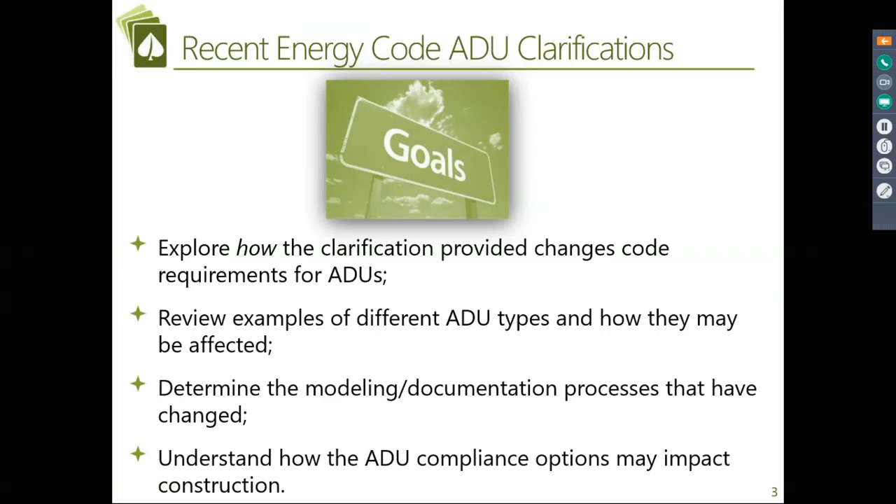So, code—now we get to talk code, everyone's favorite part. Our current code is the 2016 code, and we have another one coming up very soon called the 2019 code that goes into place January 1st of 2020.

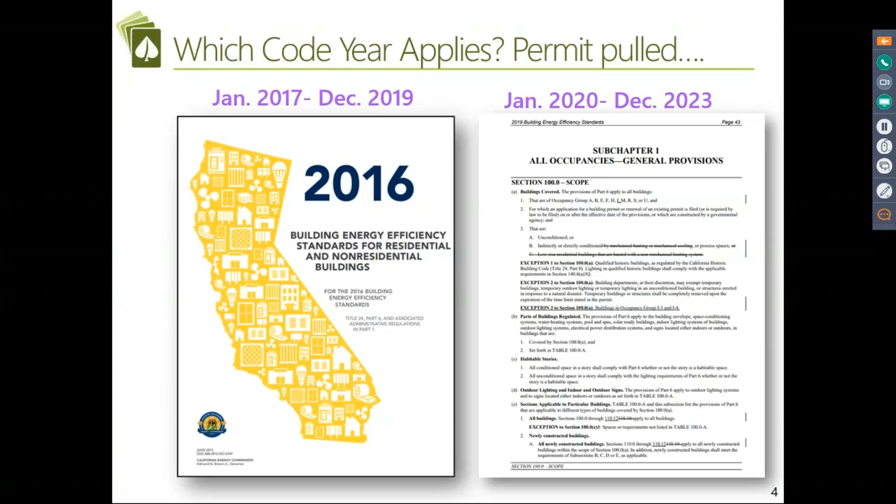How many of you want a spoiler alert of how ADUs are going to change for the next code cycle? Raise your hand. So what I do is give a spoiler alert, because I want you to make sure you understand current code versus next code.

So Reference ACE—it is really my favorite tool ever. I am looking things up in the code constantly. I think I have them memorized, but I always prove myself wrong. This has the code language, the manuals, the appendices, everything the Energy Commission provides to support the standards. Everything is searchable, hyperlinked, you can use it on your phone. Yes, I do have it on my phone—I am that kind of nerd.

What is an ADU? I found this particular resource from the California Department of Housing and Community Development. I thought it was one of the best resources I was able to get my hands on explaining what an accessory dwelling unit is and how the laws have changed with the series of Senate and Assembly bills that Ada discussed, and how it affects what we're looking at.

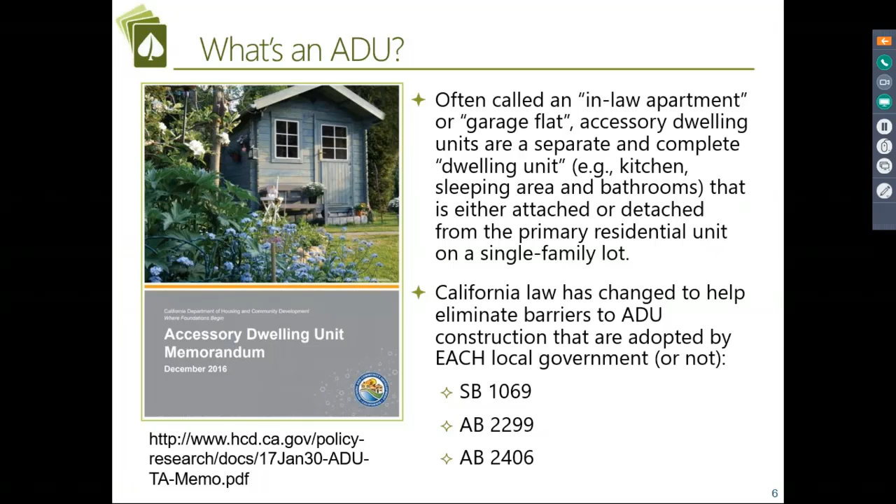It does clearly state that each city or county or authority having jurisdiction has to come up with their own formula for how they're going to look at ADUs. So don't always think what you think you know is going to apply to the city next door—you have to do your research city by city, county by county, jurisdiction by jurisdiction.

So I, of course, decided to look for what cities have put out there. Do we have someone here from the city of San Francisco?

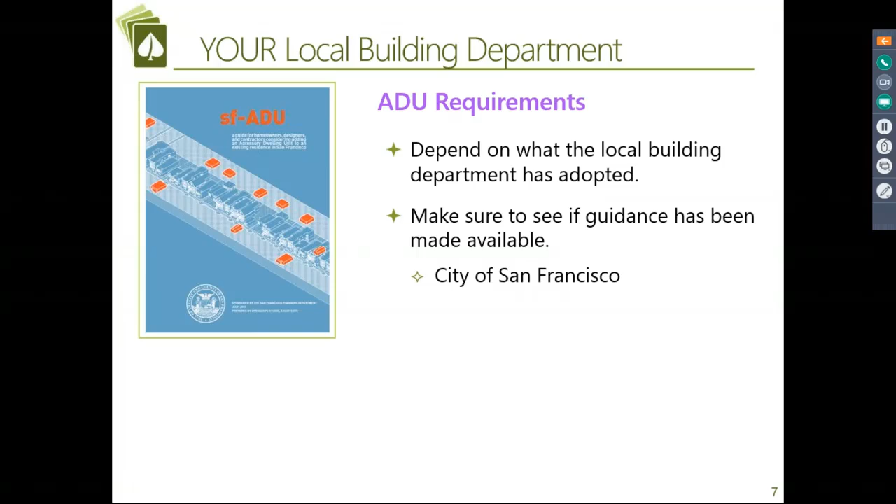This is the most amazing resource to support how to build and what the impacts are and what the projected costs are for building ADUs in San Francisco. It was one of the best I have seen, and I think everyone building anywhere should look at it because it had beautiful descriptions of all the different types of ADUs, junior ADUs, and how it works with multifamily. Such an amazing resource, so thank you City of San Francisco.

This was gorgeous. I really liked the City of LA's also. They were a lot more graphic, a lot more simplistic in their explanation of how ADUs work in their particular city.

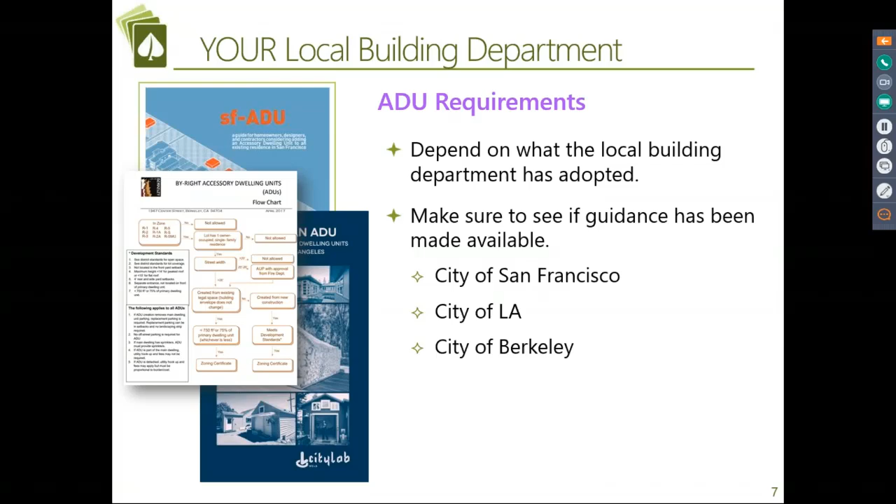And I, of course, can't ever ignore City of Berkeley because they're my backyard. They have a great flow chart. I liked how they talked about this particular conversation as a flow chart of what do I need to figure out first, second, third, and how will it apply to my construction permit process. So there's lots of great information out there.

So the Energy Commission has a quarterly newsletter that they call the Blueprint. Who here has heard of the Blueprint? Raise your hand. Okay, all of you should know it.

This is how the Energy Commission communicates with us throughout a code cycle and lets us know about clarifications. This is how we find out that things might look a little bit differently than what we thought they looked like. So they're available through the Energy Commission. I'm going to show you how to get to it at some point—I can't remember where I put that slide. And I asked the Energy Commission to give me a statement on why and how this clarification came out.

Chris Olvera is one of my favorite people over there, and this was their statement: the construction of ADUs has just grown, and the energy code and how we were looking at it can be very restrictive to how we look at ADUs and how that constructability can be. Taking this on as, hey, what's the best way to look at this in terms of the energy code—they came up with this clarification. And honestly, it blew me away.

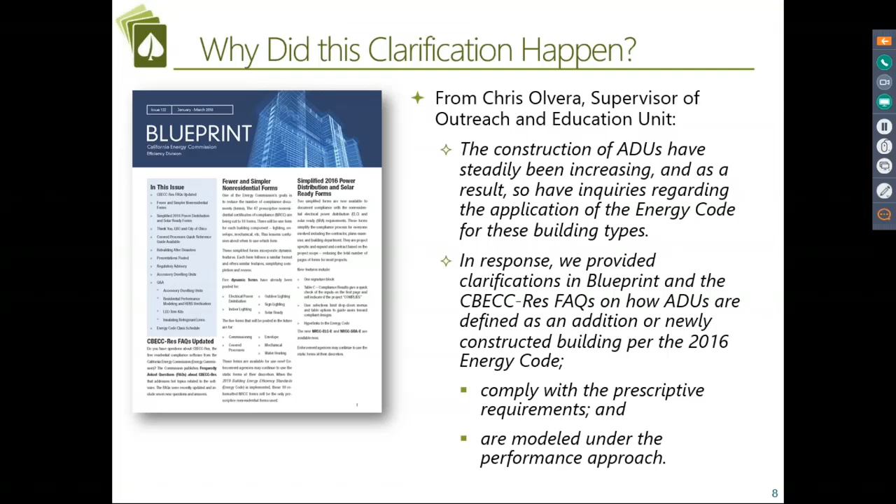When this blueprint came out, they say they time how quickly they'll get a phone call from Gina after a blueprint comes out. This was a 30-second time lapse between the email that came out and Gina's phone call to the Energy Commission going, what? Really? Oh. So I immediately—I think within 25 days—we did our webinar on ADUs because it was such a big thing.

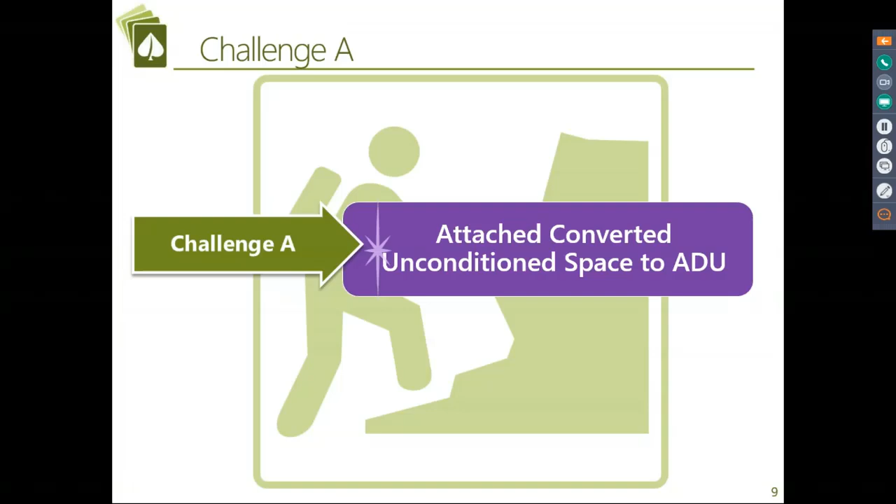So per the Energy Commission, there are 4 different types of ADUs. We're going to walk through those relatively quickly. The first is an attached, converted, unconditioned space to an ADU. There's handouts, and the very first page of your handout supports this particular type of ADU conversion.

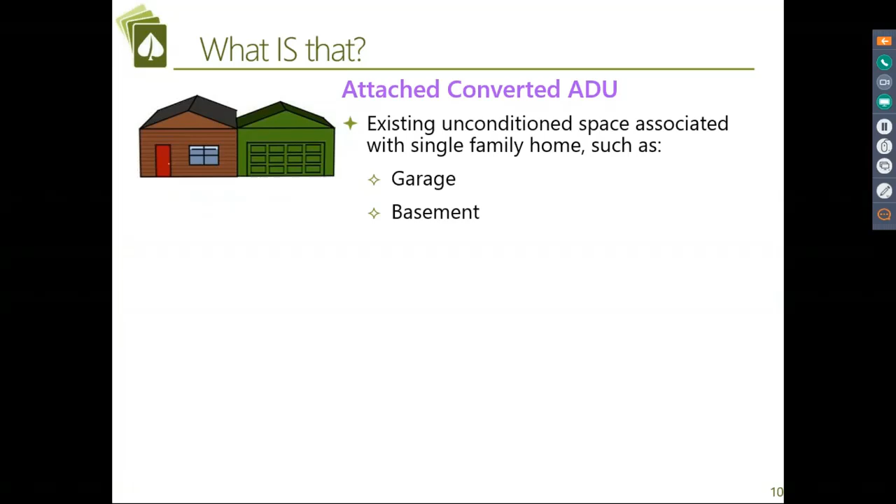So this is an unconditioned space that already exists that's attached to the single family home. Most likely this is usually a garage—that's what usually people visualize. We have very few basements in the Bay Area. I do actually have one of the few houses that has a basement. I got the price to convert my basement to an ADU because they have to dig down—$100,000 just to dig down. Yeah, it's not going to be an ADU.

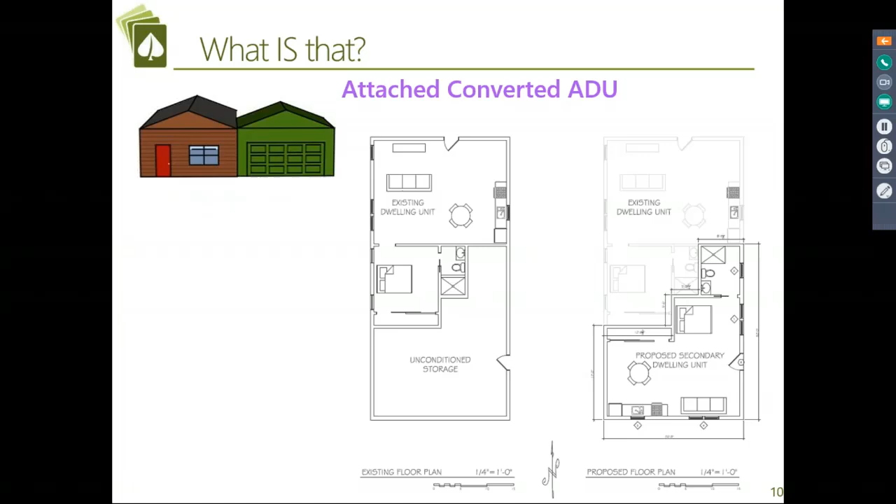I got to tell you, the Energy Code does not differentiate between an ADU and a junior ADU. All the code requirements under Title 24 Part 6 apply exactly the same. So what is it that we need to be cognizant of? Before this clarification, that was considered an addition, and as an addition, it would have to meet all of the Energy Code requirements of new construction as an addition. That space didn't exist before as conditioned space, so it has to meet current code in terms of the building features.

What I got to tell you—does anyone know what we're doing in California in terms of energy efficiency? If any group should say, oh yes Gina, it should be you. We have some very aggressive goals in California, and every single time I talk to a homeowner, they are blown away by what the Energy Commission, the Energy Code, expects of their building type. They're like, what? But my house I'm in now doesn't even have any insulation at all, and you want me to build this? It's always a fun conversation.

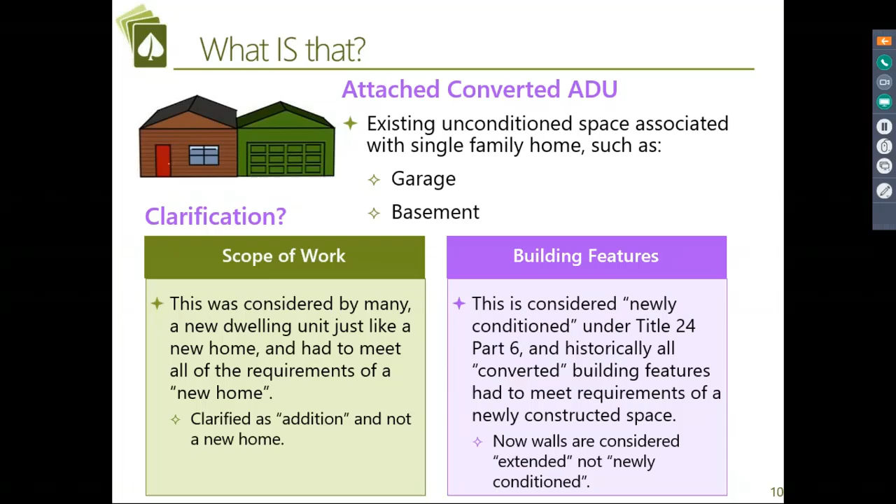The clarification says that existing unconditioned space attached to legally permitted conditioned space is considered altered. So now we don't have to consider those walls new. They're what we call extended. I hate that they call it that, I think 'converted' should be the word we use, but they're what we define as extended. That roof now can meet all of the exceptions and flexibility associated with additions because it's not considered a brand new building. So let's go through what some of that is.

When we look at additions, we have two categories basically: 700 square feet or less of conditioned floor area, or greater than 700 square feet. For 700 square feet or less, there's a lot of leniency under the Energy Code regarding how that building needs to be insulated. If I have an addition 700 square feet or less, I only have to worry about R22 at the roof. That's a pretty big deal, because if I have an addition over 700 square feet, I have to have a high performance attic, and we'll look at that next with our next type of ADU.

So this is just R22, insulation could be blown in, it could be batt, it could be spray. I don't care what you're going to use. It has to be in full contact with that ceiling unless you're going to do some sort of hybrid type of attic space. And it's pretty simple to do.

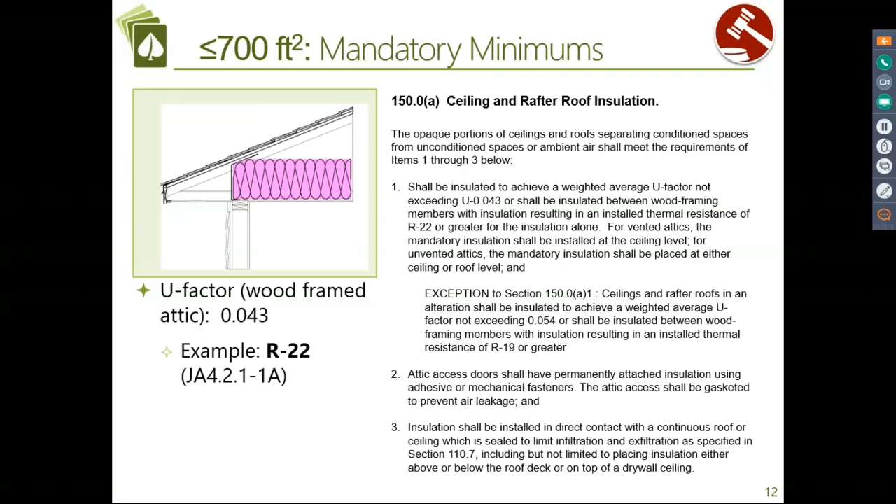This is the least of everything. I don't have to worry about a radiant barrier until that ADU is over 700 square feet. I might have to think about a cool roofing product though, if that ADU exceeds 300 square feet. I have begged the Energy Commission to please make all the numbers line up. Does anyone know why all these numbers don't line up and make this easier? Cost effectiveness. Everything under the Energy Code, every code feature has to show cost effectiveness that is going to pay for itself over the lifetime of that building feature.

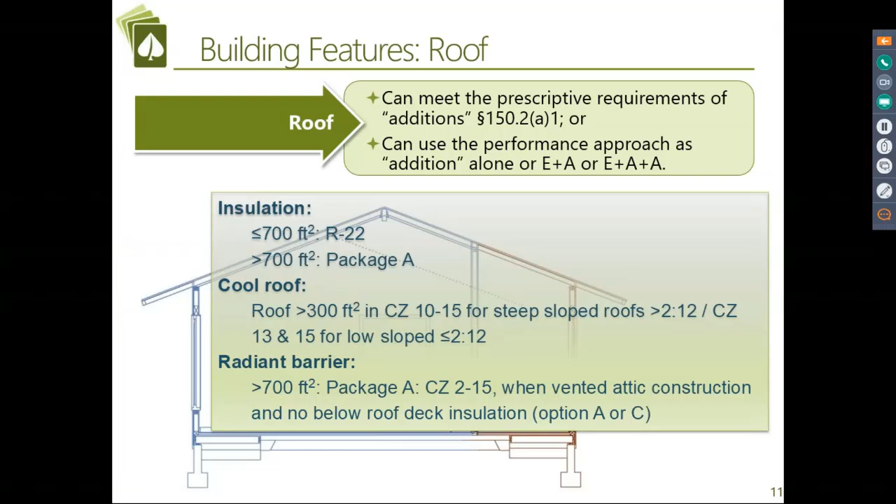So this is where we have these weird little rules about 700 square feet or less, R22. Above that, now you've opened up the door, you have more flexibility in terms of cost effectiveness to integrate a high performance attic. That's what they figured out with the cool roof at 300 and with that radiant barrier at 700. So the walls - walls are those existing walls are now what we call extended walls.

So what I've got here is we show the walls associated with that existing conditioned space, and that wall that is there already associated with the unconditioned space is now considered extended, even if it's not extended. Isn't that fun? This was a great clarification. But what it means is it gets all the leniency associated with extended walls. It was their way to find something that was in the code that made sense and allowed us to alleviate cost associated with ADU conversions. That made sense.

So this particular ADU, can you see how we have existing walls that now are going to be converted into conditioned space?

So extended walls get the exception of: if it's a 2x4 framed wall, I have to fill the wall cavity with a condensed batt of R15. A little bit more expensive than R13. It's not always easily available. Sometimes we have to tell people order it way ahead of time because this is a relatively unique insulation in this day and age. But if I have R15 insulation, you're done.

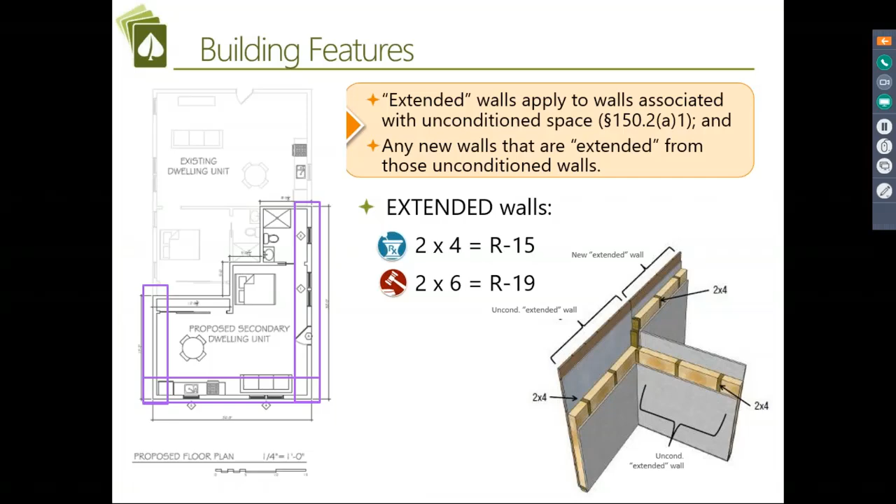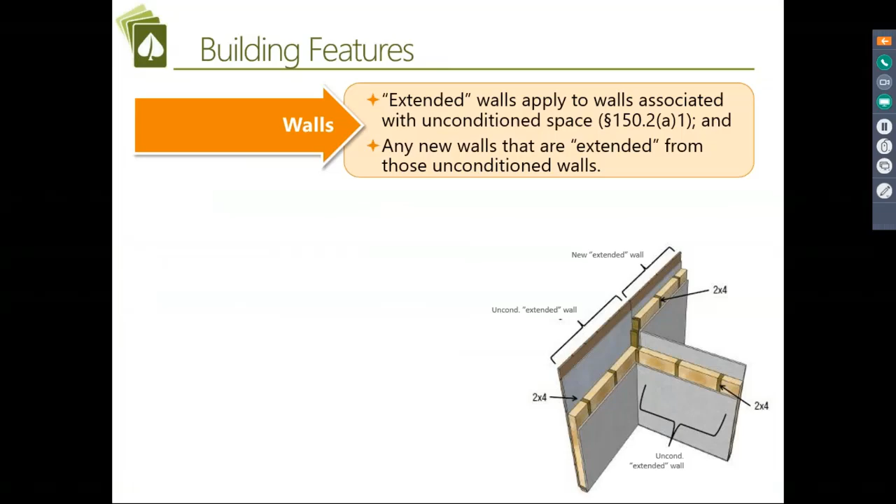If it's a 2x6 framed wall, use R19, you're done. Spoiler alert: our 2019 code, that 2x6 will go to R21. Not a big change. Same thing - calling this an extended wall stays exactly the same. The stuff for the roof also stays exactly the same. So not a lot of changes going on here for the next code cycle.

Fenestration: windows, glass doors, skylights - it's all about size of addition. So if I have an ADU that's 400 square feet or less, I get up to 75 square feet of fenestration to use wherever I want, depending upon your climate zone. If you're in a climate zone that is not climate zone 2 - that's climate zone 2, 4, 6 through 16 - so here we're in climate zone 3 today. We don't even have to worry about west-facing restrictions if we're in climate zones 1, 3, and 5.

Otherwise, we do have to think about how the building is oriented, how the sun is hitting it when people are usually coming home from work, and there's a lot of sun on those windows and they're using a lot more air conditioning. We're fogged in when it's hot outside. We actually have shown we use more heating in the summertime than we use air conditioning.

So you get a lot more leniency in how much window area you get, because a brand new home, it's 20% of the conditioned floor area. For this smaller size, it's 30%. It's kind of nice, it gets a little bit bigger, between 400 and 700 square feet, it's not 20%, it's 25%. We're still getting a little bit more allowance, understanding we need to get that natural light into the space, and we need egress, and we need ventilation.

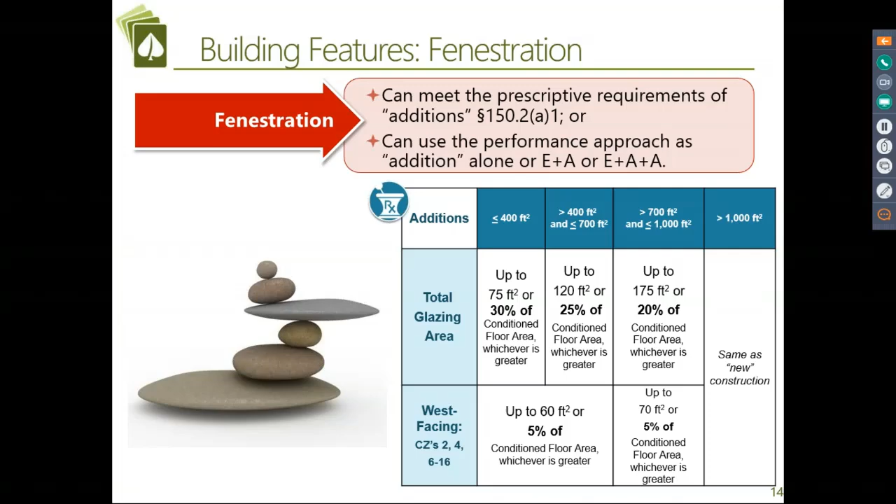So, HVAC, indoor air quality, and domestic hot water. I'm going to spread my love of this topic as we move along. I am a plumbing designer as my beginning trade, so whenever we talk about this, I'm like, this is the most important part of the home.

So the energy code dictates indoor air quality the minute we have an addition, which is now a converted ADU, exceeding 1,000 square feet. But is that really what we want? Shouldn't each dwelling unit get its own indoor air quality ventilation system? So we highly recommend that each dwelling unit, I don't care how big it is, has its own indoor air quality ventilation, but the energy code cannot dictate you do it until that ADU conversion exceeds 1,000 square feet.

One thing you do need to know, though, is that the mechanical code will not allow dwelling units to share return air. So if you have a standard split HVAC system with ducting running all around your attic, and you want to tap into that for your ADU for those two bedrooms you might want to convert, you can't, because you're sharing return air. We don't want to share what you might be doing in your personal space with my personal space.

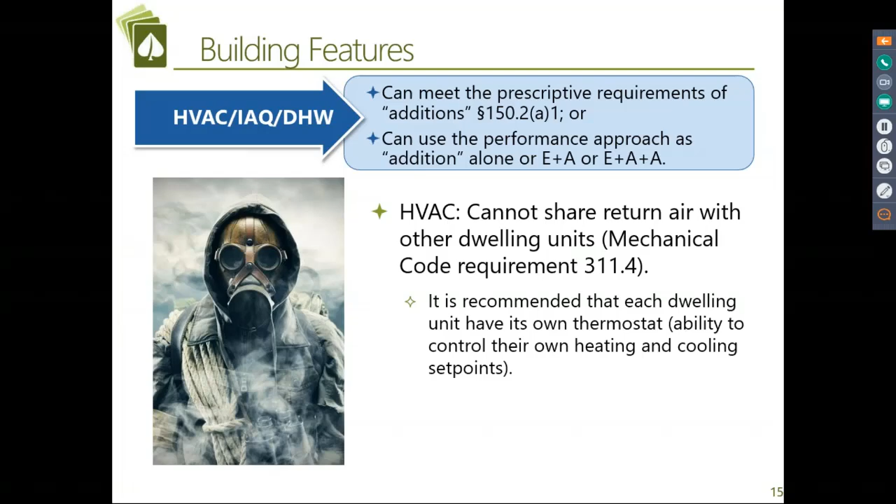So what does the CF1R say? This is what I was going to speed through since you guys don't do it. The Energy Commission has a beautiful form just supporting additions, and that is not facetious, it actually really is a beautiful form. They really walk you through what's the size of your addition. Remember, we had all these weird rules depending upon size of addition? Well, the form automatically will populate those window area allowances and so forth based on your size category.

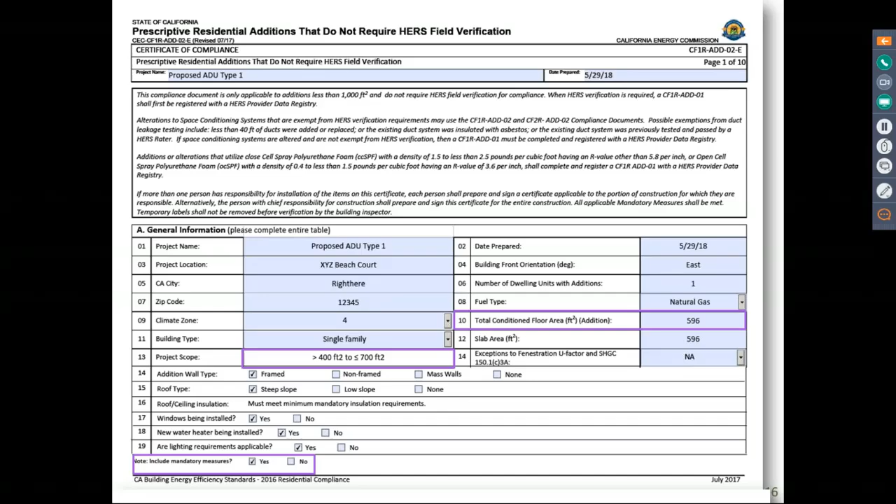So these are things that I just really love about the form. There's a lot of drop-down menus, there's a lot of interaction. This is, to me, one of the best types of forms we've seen. I've been doing this since 1991, so a very long time. It's one of the best forms we've seen in really understanding how the energy code applies.

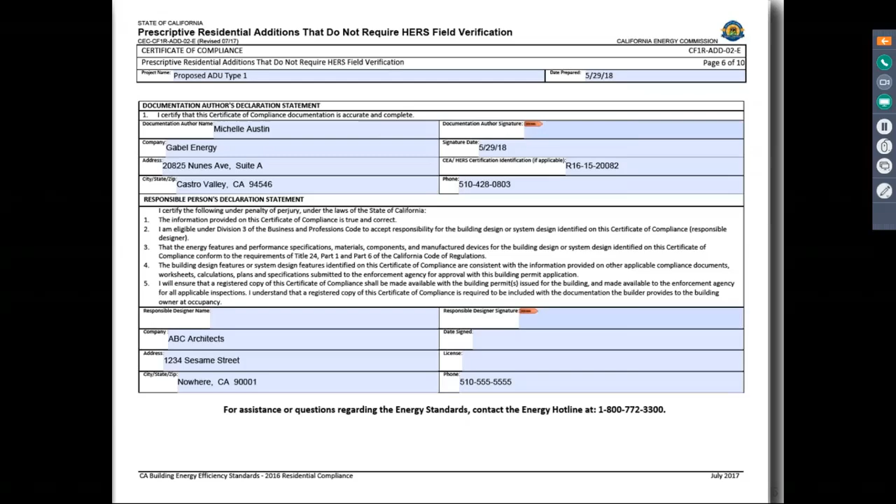Typically, we're not going to have HERS measures associated with these small additions because I really want to get away from ducted systems. The minute I have a ducted system, I will have HERS measures. If I don't have ducted systems and I don't have an ADU that exceeds 1,000 square feet, I typically won't have any HERS measures. And there's a lot of complexity associated with registering documents and having third-party inspection when we have HERS measures.

Questions on converting an existing space that's attached to an existing home before I move on to the next one? Got it down? Okay, on to the next one.

I'm attaching to my existing home, but I'm building it from scratch.

That's the second page of your handout. So this could be: I had nothing there before, but I've got the area in my yard to extend out and put conditioned floor area where it never existed before, and there was no structure there at all.

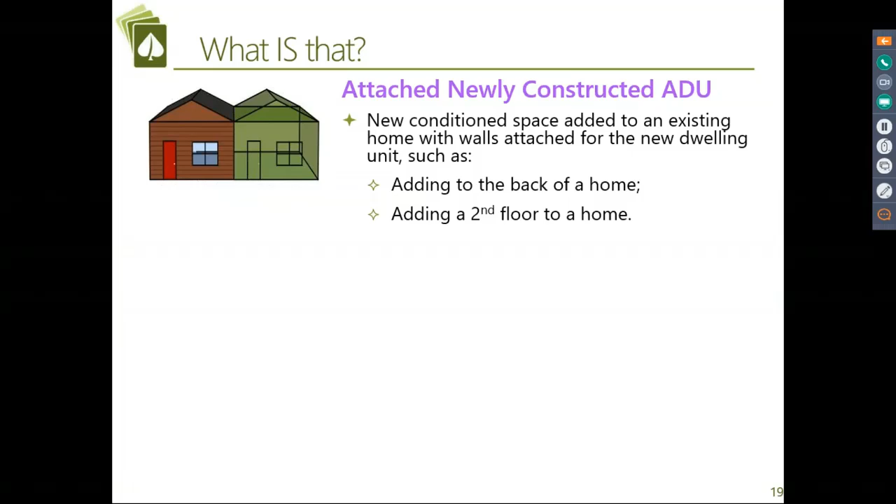This particular project, to me, seems better now that they filled that gapping corner and they're adding an ADU to a space where they never had anything before. They're having less yard to put in a brand new ADU. So these are brand new walls. There were no existing walls, brand new floors, brand new roof. Everything is brand new, but it's attached to the existing home.

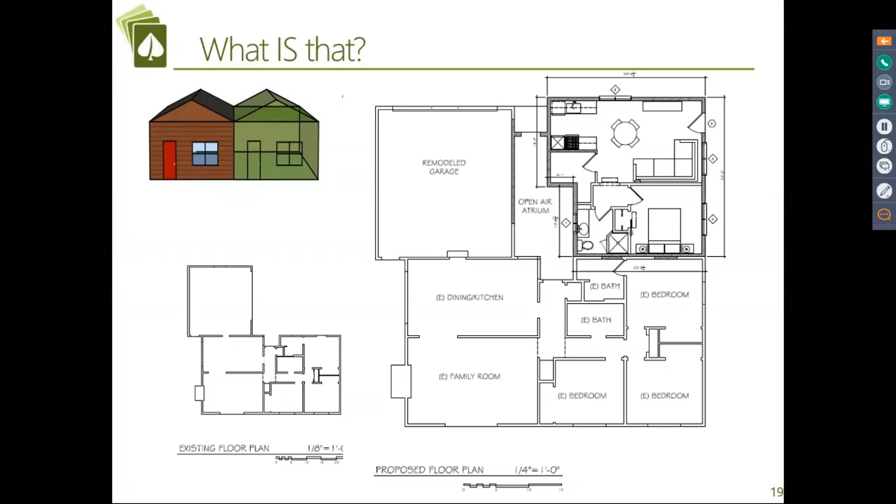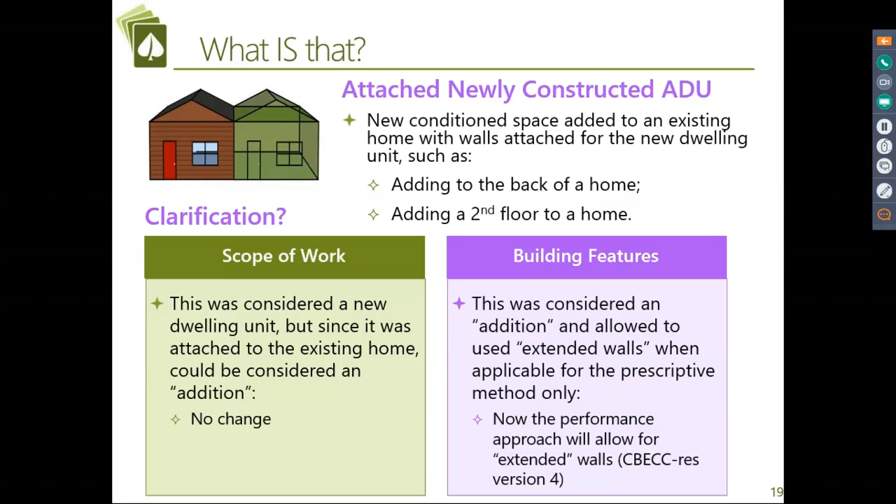This looks and feels just like an addition. So the clarification is: this is an addition, and all of the allowances for additions based on size and extended walls apply to this same type of construction, even though it's its very own dwelling unit. It is an addition to the existing home.

So for the roof, if I had an addition that's over 700 square feet, remember R22 isn't my exception anymore. Let's look at what it would look like, what I'd have to think about the minute my ADU is over 700 square feet. I have 3 different high performance attic requirements. We're going to go through these throughout our various types of ADUs.

So option A is I have insulation at or above the roof deck. Anyone seen that in real life? I never have. This is an elusive beast called option A. Spoiler alert, it's going away in the next code cycle because no one is doing this. Building science wise, this is the best. But roofers are typically in charge of the insulation and they will not take on that liability. That's why we typically don't see it.

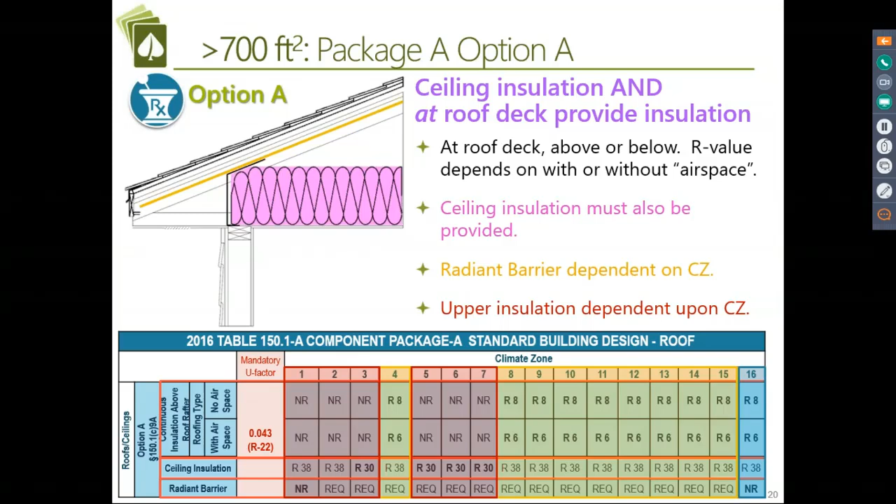So don't be thinking that this applies everywhere. Be cognizant of where the project is.

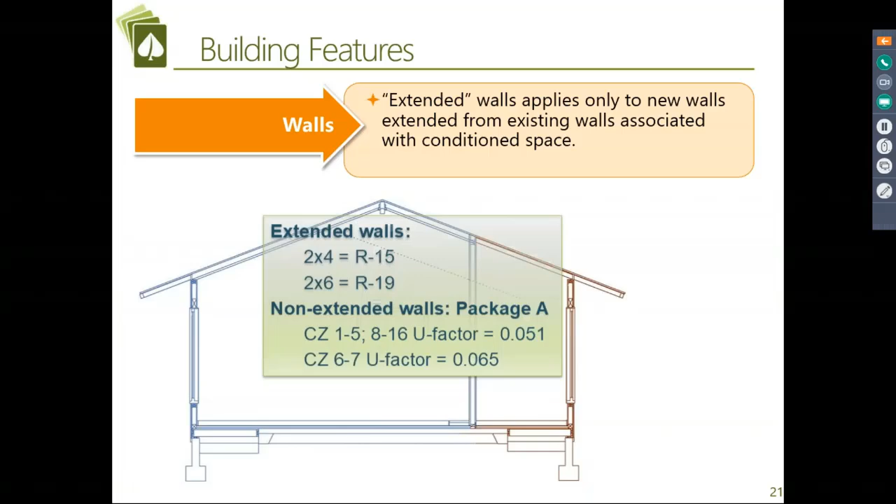Walls. Now I have extended walls and new walls. You might think they're all new walls, but I, as your energy consultant, am immediately going to be thinking, is it an extended wall or a new wall? Because remember, extended walls 2x4 are 15, 2x6 are 19. New walls, now we're talking 2x6 with R21 insulation and an extra 1 inch of rigid insulation outside the framing. That's what we're talking about if it's a new wall.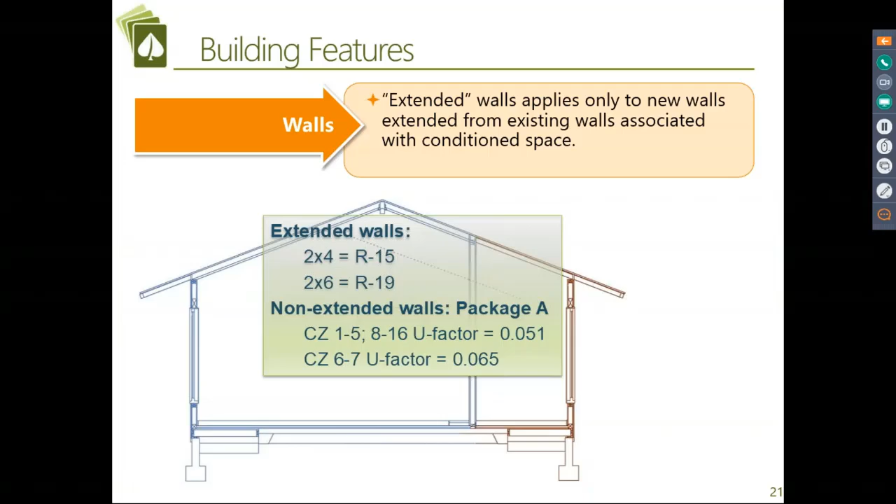What's that small little floor plate we have going on here, and how close are we to the property line? This is what usually becomes the biggest discussion with all our clients. So here is our project, and I've labeled some walls here, A, B, C, or D. I'd like you to tell me which letters are extended walls.

C is an interior wall now. It's now conditioned space on one side, conditioned space on the other. So that is an interior wall. B and D, excellent. So B and D are what we call extended walls because they're extending the plane of the existing walls that were there already associated with conditioned space, meaning all the other walls that aren't extending from that plane are new walls.

So here, potentially, if we do this, a simplistic method, I have two different types of walls for this very small ADU. Extended 2x4 with R15, turn the corner 2x6 with R21 and 1 inch of rigid.

Everyone loves to construct that, right? Has anyone ever seen that in reality? No. Two things happen: they either trade it away, or their contractor does what he wants anyway, and potentially final inspection is going to go horribly wrong because the walls do not match up to the promise of the energy compliance report.

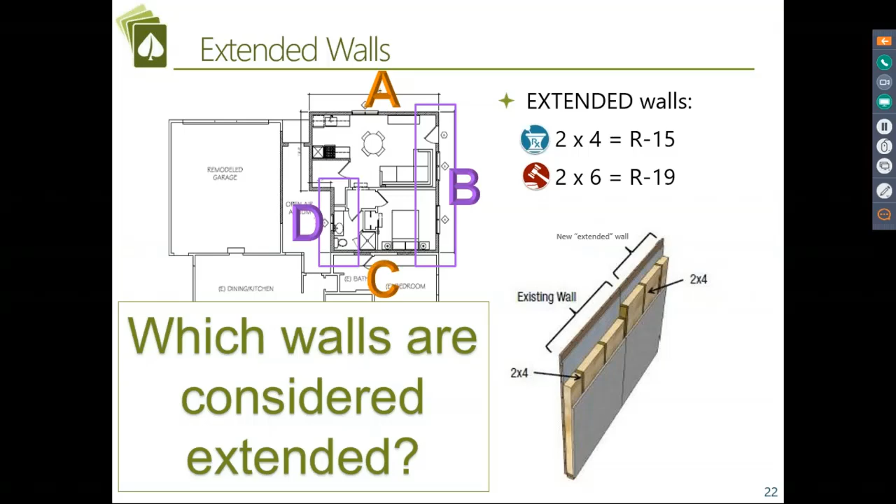So for new walls, again, the Energy Commission is looking at wrapping the building, embracing the building with rigid insulation. It is really helping a lot with the heat transfer associated with framing, but honestly, the biggest thing it's doing is preventing infiltration.

Because I want to add, do any of you insulate? Have you ever insulated your own home? Yeah, I hope all of you should do it once to understand the torture those people have to go through. My kids know it too, because they get to do the little spots.

But it has to be done beautifully. Insulation doesn't work if it's compressed. It is not fully fluffed. Tell everyone, fluff. There's another reason for a crochet hook in your life. That rigid insulation is preventing all of that improper installation and having a really nice high performing wall. This is why it's called a high performance wall, because of that rigid insulation.

What might be another way for me to get this U factor of 0.051? Who here has built a home or designed a home with rigid insulation on the walls? Yay! Get the details from them, honestly. Detailing is the hardest part about that. What have the rest of you been doing?

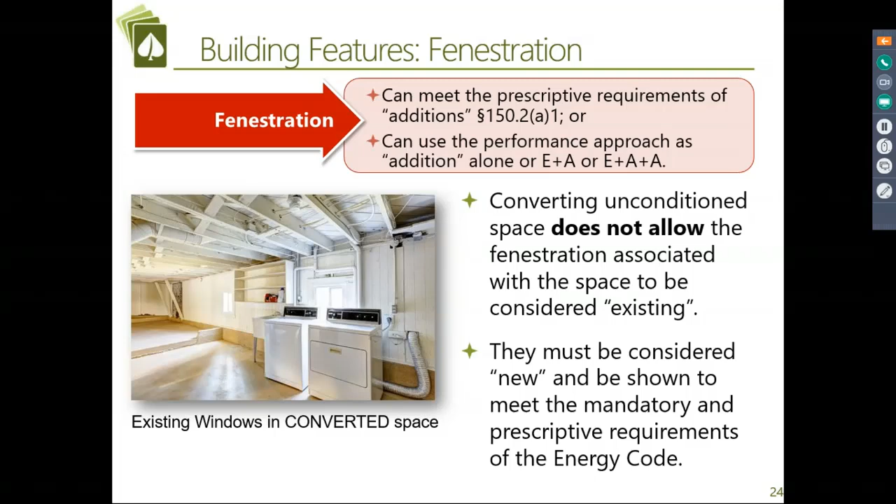When it's new construction, adding on to my historic home, do I get the same historic exceptions for this addition? No. Planning might say you have to make it look exactly like the existing building, but the energy code does not give you that flexibility because it's new construction. You have to be very creative in ways to get it to blend well.

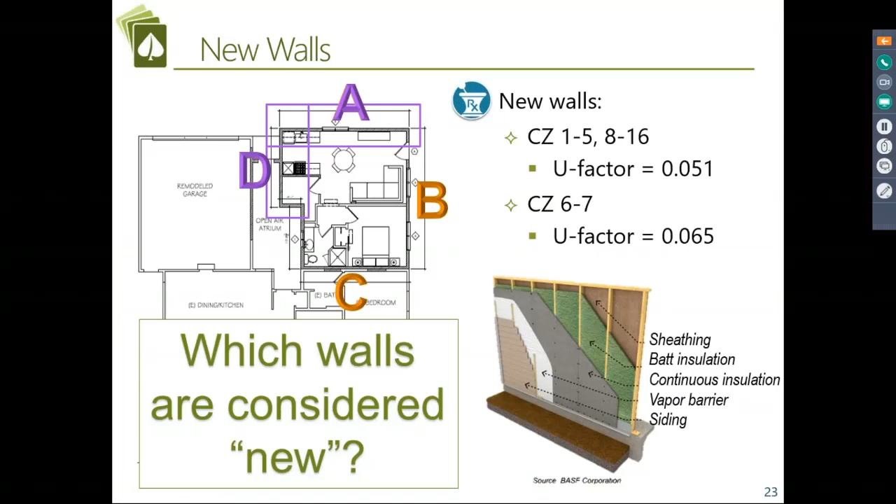When we talk about windows, we've already discussed how much window you have facing which direction. But I also want to talk about the performance of that fenestration product, in terms of SHGC and U factor.

Solar heat gain coefficient is the ability for that product to prevent solar heat gain when the sun is hitting those windows. U factor is the ability of that product to prevent heat transfer from one side to the other. This could be cold outside and hot inside, or cold inside and hot outside—how is that heat transferring back and forth, and it has nothing to do with the sun.

And these numbers are actually pretty aggressive. We have a U factor of 0.32. This represents a non-metal or thermally broken, dual-paned, low E triple, argon-filled product.

We have an SHGC of 0.25. This represents a low E triple. When I say low E triple, I don't mean triple paned—I'm saying there's 3 coatings of low emissivity film, that coating associated with the product.

The main component to low E is which element? What is the major element behind low E? Silver. So we're talking 3 coatings of silver to meet this 0.25 SHGC requirement.

I always have that conversation with my homeowners: this is just like putting 3 amazing sterling silver rings on your finger. Was 1 cheaper or was 3 cheaper? So you are paying for the privilege. But honestly, it really pays for itself.

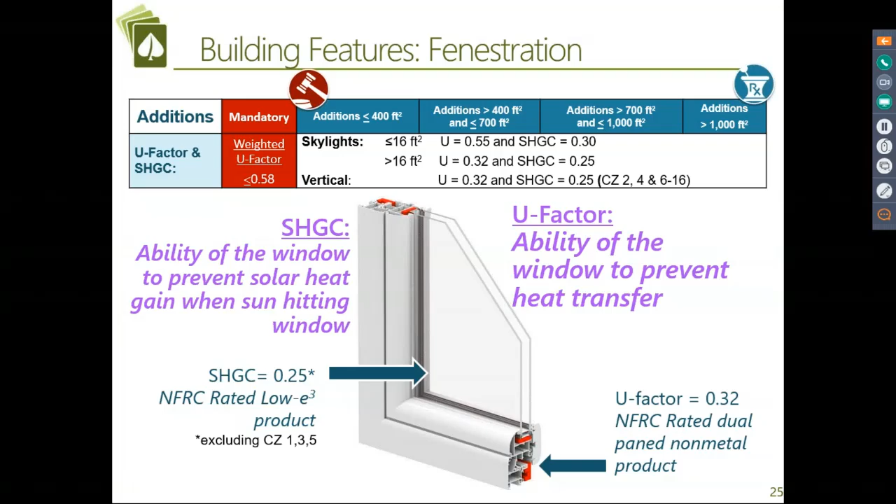The first thing I've done with every house I've ever owned is upgrade the windows. And I spend as much money as I possibly have, stealing from my kids' piggy bank and begging money from my parents at the same time, because it's the one thing that can make such a difference to a home.

So HVAC, indoor air quality, domestic hot water—we already talked about this a little bit. I don't have to worry about providing its own indoor air quality ventilation system until that ADU, now an addition, exceeds 1,000 square feet, though we strongly, strongly, strongly recommend it be done anyway.

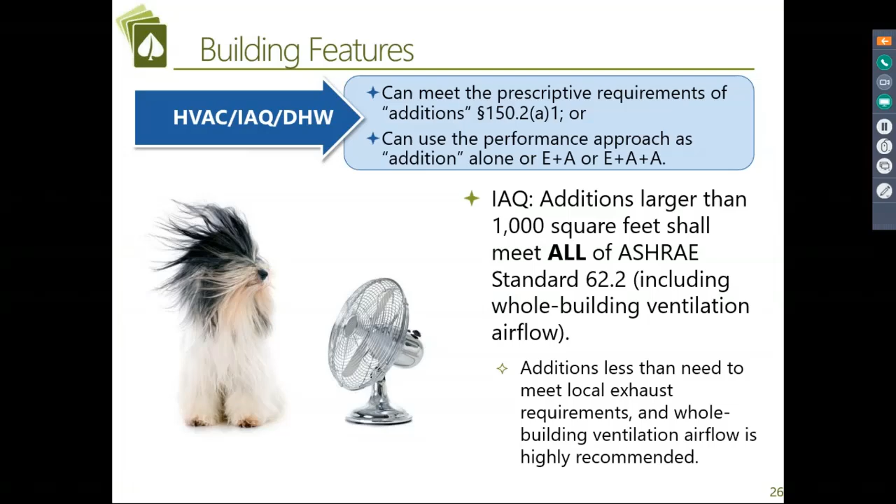Spoiler alert: next code cycle they cleaned this up. Now, in the 2019 code cycle, any new dwelling unit, I don't care how big it is, will have to have its own indoor air quality system.

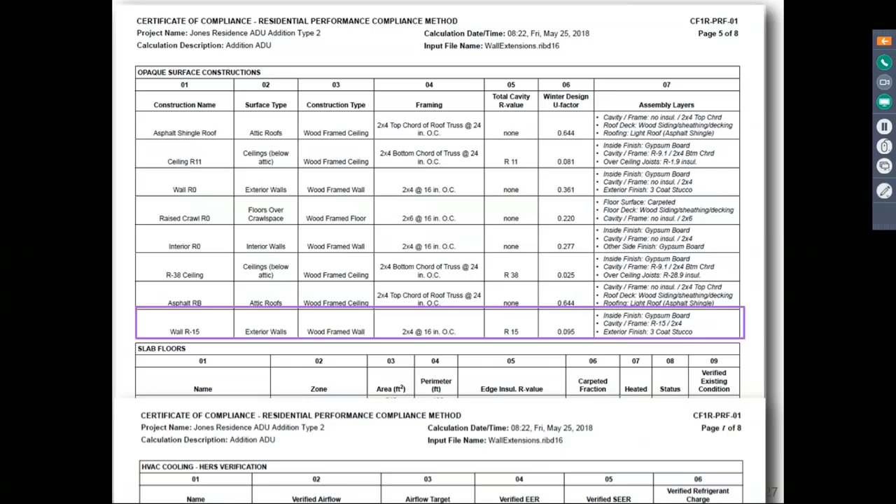So what does the calculation say? We're not even really going to talk about this because you guys don't look at these. You really should at some point in your lifetime because it tells you what's going on.

I was also asked to talk about when an ADU is made out of a space that's already there—a couple of bedrooms, that's that discussion Ada had. I'm adding a cooking device, I added a door to the outside. When is it a junior ADU? How does the energy code look at when you're carving out of your existing home to turn it into an ADU?

So my example here is that, hey, we don't really use that family room. Everyone live in your rooms—we're going to turn that into an ADU. Your kids wanted to be there anyway; they don't want to be out in the living room. Who else has teenagers? Yeah, you know what I'm talking about.

So what has to happen to the roof? What do I have to do to upgrade the roof per the energy code because I'm converting existing conditioned space to an ADU?

Nothing. It's already conditioned space. Walls - what do you have to do to the walls because you're converting existing conditioned habitable space to an ADU? There's a pattern here.

Nothing. Excellent. What do you have to do for fenestration? Nothing. Floor, nothing. Oof. HVAC.

There's no pattern going on here. What do you have to think about now for HVAC? You can't share the return air. So this is really, honestly, for the energy code going to be your most expensive item, because I would honestly be thinking about putting a mini ductless split system in here, separating out and putting in their own indoor air quality ventilation system. Hey, if I'm really short on funds, I might put in just a wall furnace. It all depends on where I want to go.

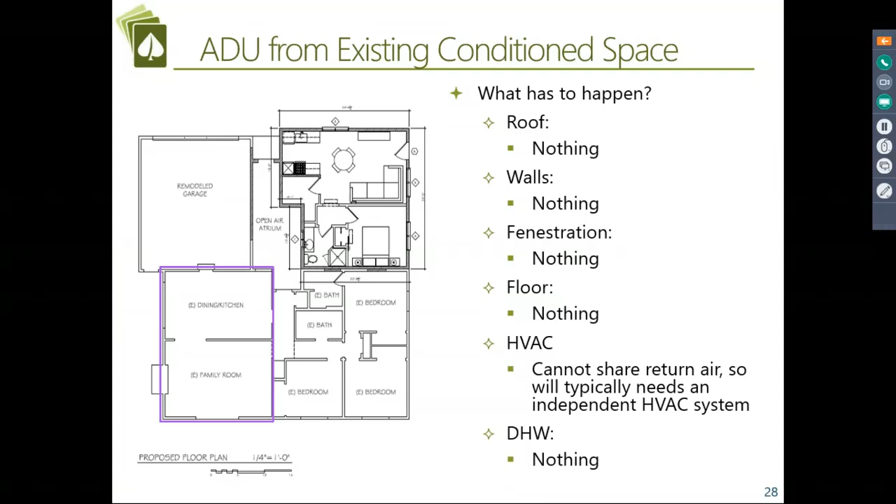What do you have to do for domestic hot water? I'm going to tap into the water heater that's already serving the home. Nothing - that's totally allowed. You can share hot water with others, please do. Any questions on adding on to a home and building from scratch?

I love it. That's either you're bored silly or I have done this really well.

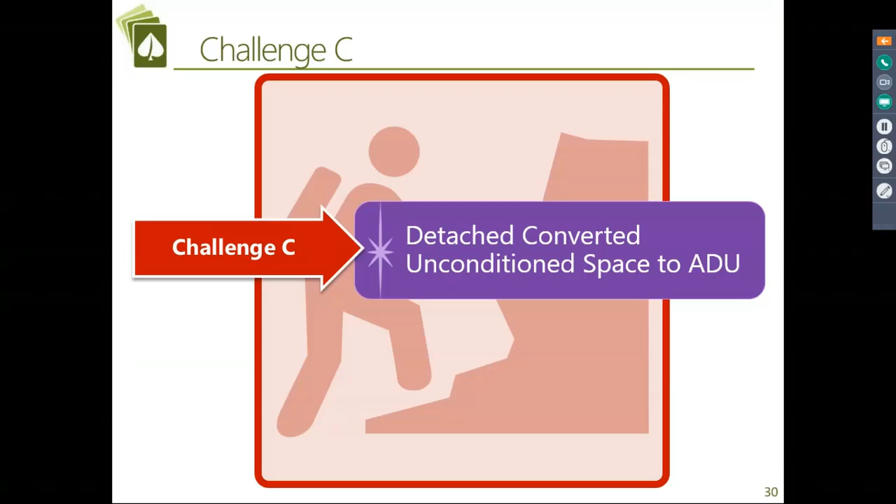Okay, detached. And I find in our experience, detached is the more popular ADU choice in the Bay Area. So I am converting an existing space, let's say a 2-car separate garage, to a new conditioned ADU space.

This could be a pool shed. This could be a - we've seen all sorts of - this could be an illegal unit. It's an existing space, it was never legally made conditioned, but it is there. So this is where I put the category of trying to get an illegal unit to be legal.

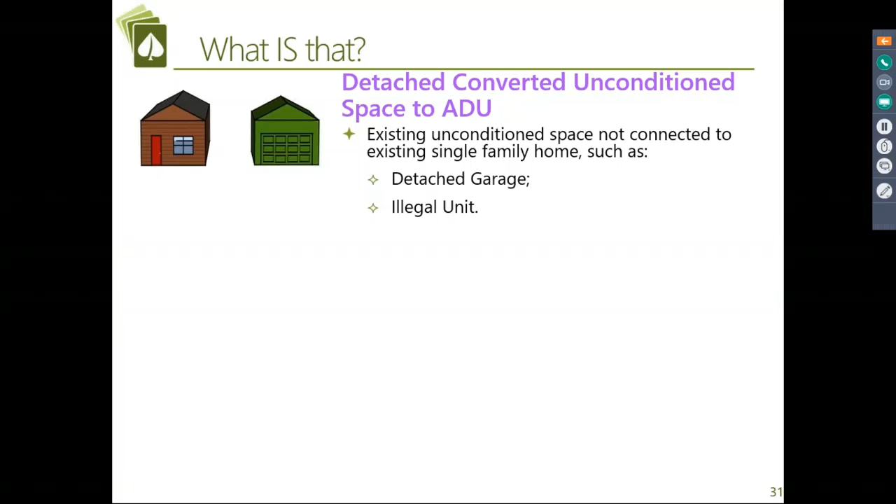And this is the one that blew me away when I read and interpreted the clarification. So previously, this was conditioned space for the very first time, and it had to meet the energy code for new construction in its entirety.

That can be difficult when you've got this existing structure. You're like, you mean I have to rip those walls down and everything down because they're not going to be able to be a high performance wall or a high performance attic? Well, then what's the point? All of a sudden now the cost to do this ADU is way beyond what they thought. They thought they can just convert a building that's already there and it's going to pretty much look the same but cuter. Everyone knows it's going to look cuter.

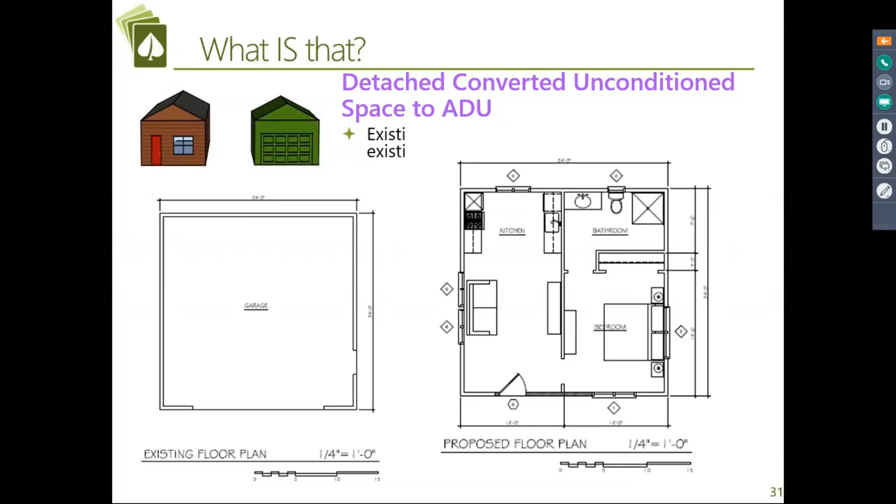So before, this was not an addition because I was not extending from the existing home. This is a completely separate dwelling unit in the backyard. It would have to be treated like a brand new home, which is pretty hard. With this clarification, this is now an addition.

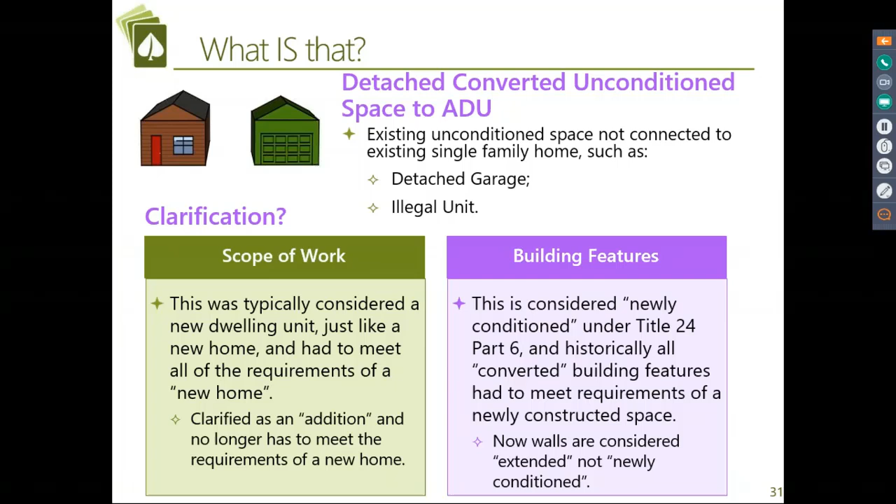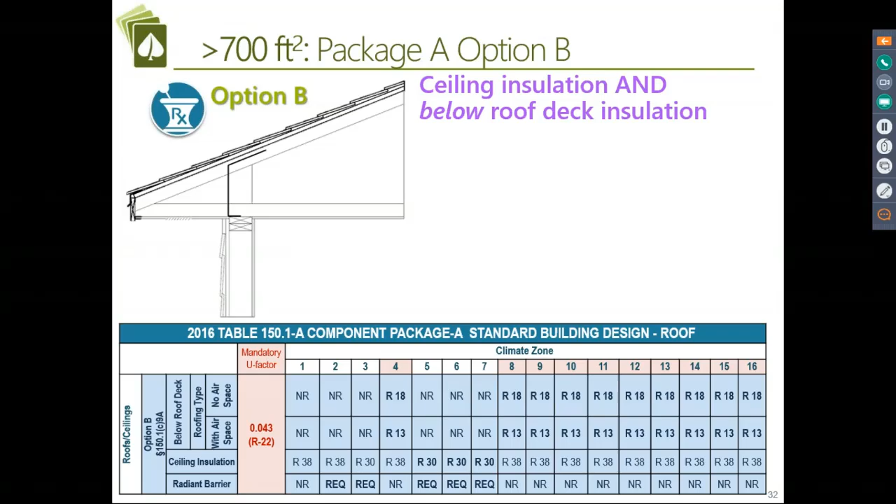Nice, super nice. Let's remind ourselves what we get with an addition. So for that roof, remember, if it's less than 700 square feet, R22 at the roof, walk away, call it done. If it's over 700 square feet, I have to think high performance attic. So we already looked at option A. Let's look at option B.

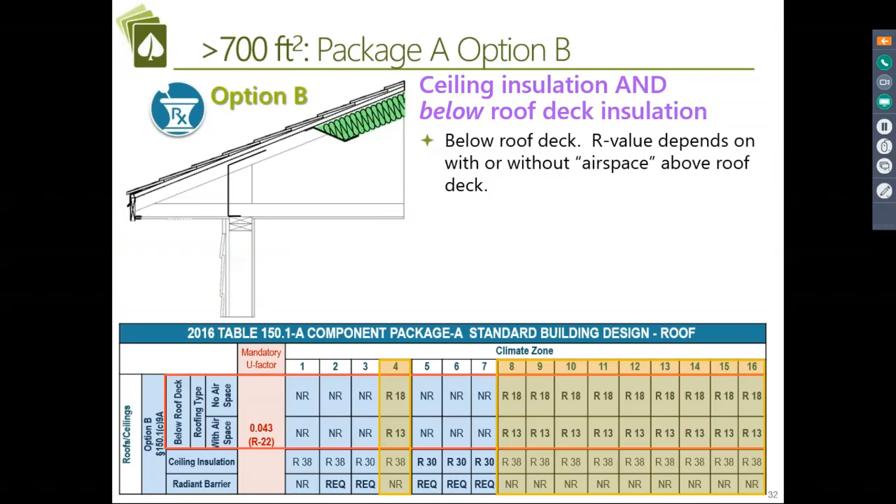Option B is I have insulation below the roof deck. So it's either wired or sprayed, or there's some beautiful blown-in products out there these days that you staple to your trusses, and they come in - it looks like pantyhose - and they blow the insulation in there, and it's pretty easy and not that expensive. I also have the insulation at the ceiling, and it must be ventilated. So I really have to have my architects think about how they're going to baffle and do upper ridge vents.

This is the most popular type of high performance attic. Spoiler alert - this is going to stay for the 2019 code cycle. The below roof deck insulation right now is an R13. It's going to move to R19. That's the difference between this code cycle and next code cycle.

So again, in climate zones 1, 2, 3, 5, 6, 7, it's so mild, high performance attics are not required. But again, this is the one we use so often for ADUs in the Bay Area because it's an extra credit now that I can use for leniency, typically towards the walls.

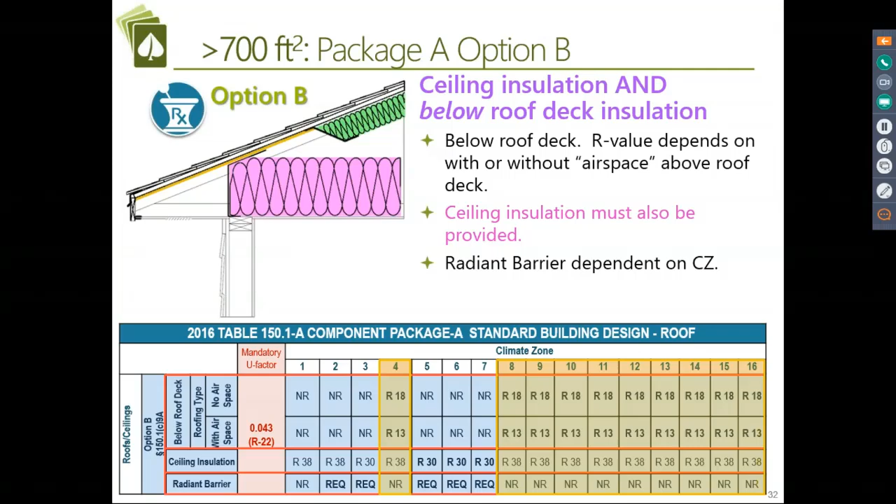So, extended walls - all of those existing walls that are there already are extended walls. 2x4 R15, 2x6 R19, next code cycle R21.

Now, let's say it just wasn't big enough. I'm converting a shed, so I needed to pop out, and I always like to call this now an addition to an addition. And I'm going to add some new construction to make it bigger. Now, if I think about that converted shed, all those walls are considered extended because it's a converted existing structure.

I just kind of gave that away. Which of these walls are considered extended? A, B, C, and or D? D, B, and C. What is A?

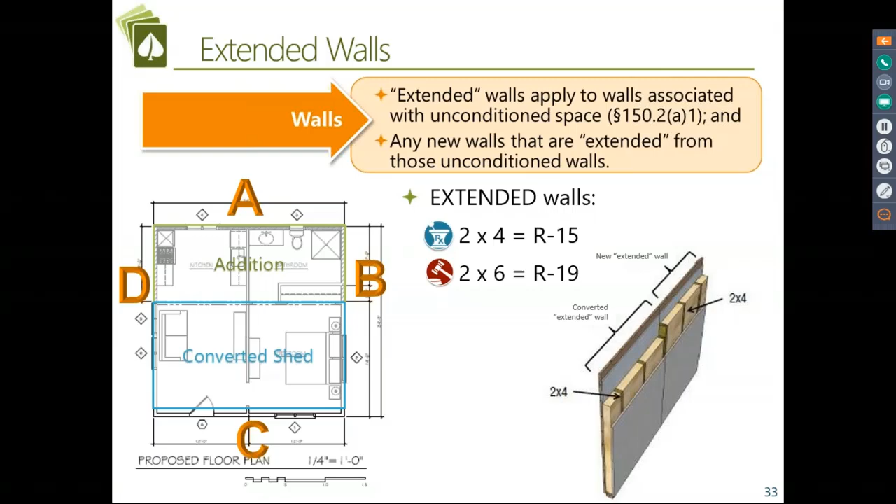That is considered a new wall. So in this configuration, that wall would have to meet that U factor of 0.051, but those other three walls don't. A lot of people trade away the ability to have that wall A match the rest of the walls. A great way to do it is to start thinking about a high-performance attic as a nice option for this particular project. And that's exactly how we got it done.

Opinion? You know I've got opinions. What do you think of that A wall? Does it matter, or is it just kind of a waste of extra effort in the building?

If I were going to do something to meet the U factor of 0.051, would I want to do it for just one wall? No. If that's my west or north wall, it probably might have some value because that's my coldest wall and my hottest wall. But this is such a small space, I'd want everything to match. And I would want to spread the love a little bit and improve that 2x4 R15 wall to match that fourth wall, if I was just looking at walls.

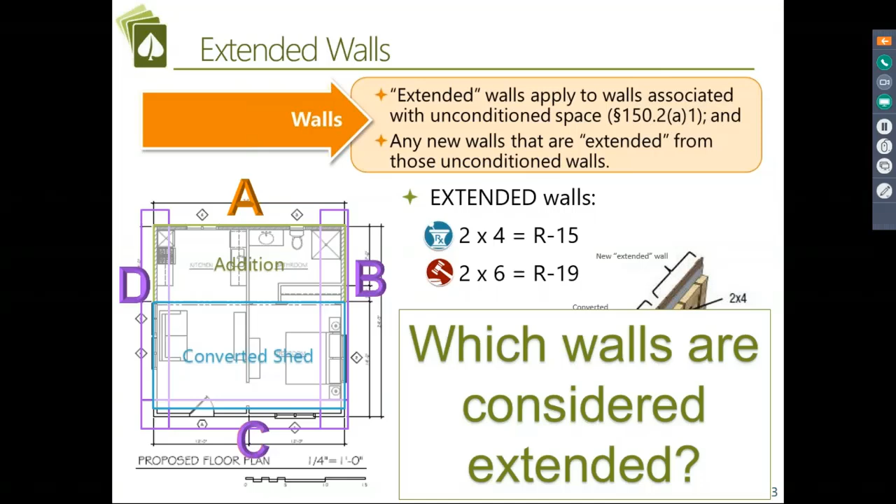So fenestration, let's talk about what type of products. We know the value, how good it has to perform. We already know how much we can have. But now we have to talk about how it is rated.

So we have default windows. These are custom windows, these might be existing windows I already had and want to reuse. Those are default windows because they're not tested, so they have to use default values that represent the worst windows known to mankind. And those values are really, really, really hard, because you have to take a penalty for those windows being nowhere near the performance of a tested product.

We do have a nice little back door for up to 250 square feet of fenestration. For these small units, that's a lot, right? That might be everything. And this is where you promise me you're going to use a very specific glazing product.

I'm going to use Solarban 70 XL Clear. Ooh, because that meets all my center of glass values that I want nicely. And I'm going to promise to use either a vinyl frame or a wood frame, a frame that doesn't conduct heat well. I'm not going to do metal. Can't do this with metal. You can try, but it's not going to work very well. That promise gets you to a value that's very, very close to what you're required to do.

So it's something that's associated with site built. This is windows built just for the configuration of that home. Architects love site built glazing because it's whatever they think up in their head, it's not what came out of a catalog.

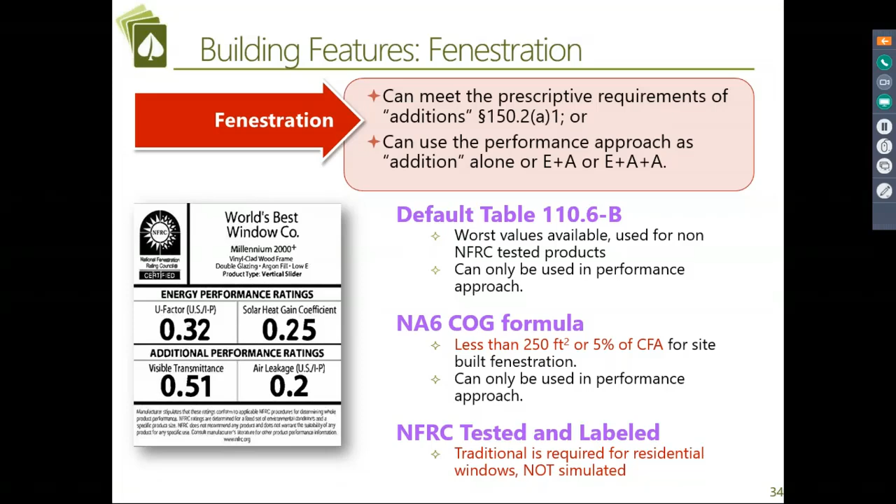So it sometimes can become a challenge if we want unique window configurations to be able to meet the fenestration requirements. Domestic hot water and indoor air quality, HVAC.

So what I wanted to talk about now is you're going to add a water heater just for that ADU. So here's this ADU free floating in the backyard. You can either one, trench out water piping and have it served by your water heater of your main house, it's not an option I would really recommend. Or you can add a second water heater to that property, that's a single family home with no penalty.

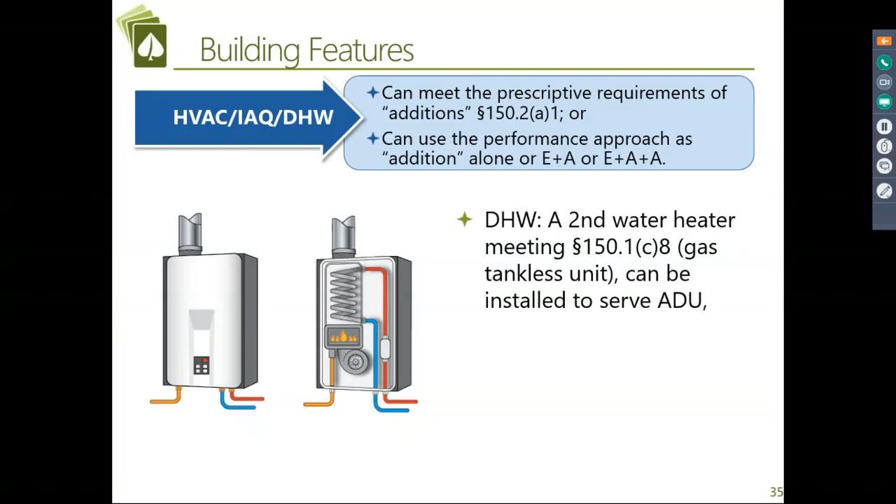So if the existing home only has one water heater, you get to add a second water heater gift. It's a gift to you. It has to meet the prescriptive requirements for water heaters, which is a gas tankless water heater. And that can be an issue in terms of getting that gas piping back to that back unit. This is usually what causes the biggest heartache. Spoiler alert.

The next code cycle, the 2019 code cycle, opens the door for heat pump water heaters beautifully. A heat pump water heater is now a prescriptive water heater option, not just a gas tankless water heater. I love that there's a whole class on heat pump water heaters. All of you who want to think about them, please get some knowledge about what it means. There's no such thing as a tankless heat pump water heater, it has to have the tank. The technology may be available, but it doesn't meet our efficiency requirements.

And that's pretty big. The smallest heat pump water heater I know of is 50 gallons, typically 55 gallons. So where are you going to put it? It has to be indoors, it can't just be stuck outside the building. You really have to think about good design practice and where you'd put it so it doesn't take up room. You could put it up above in a closet or somewhere like that. This doesn't have footprint impact in terms of usable space, but it has CO2 impact. If you do a heat pump water heater, you have footprint impact of where it's going to go in your conditioned floor area space.

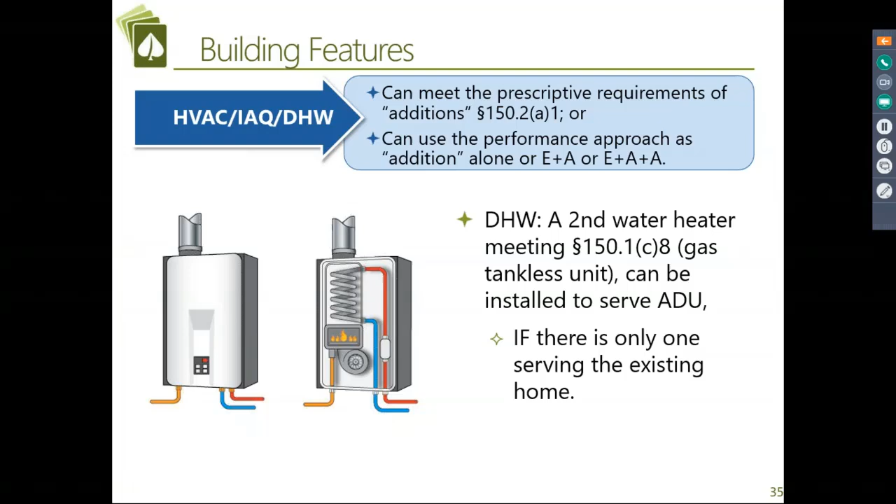You'll have to see - the 2019 code provides for a heat pump water heater that's in a garage or in the conditioned space. So there would have to be some interpretations about what could be considered a garage - is a storage room really a garage? That's where they were looking for a volume space, a wall against a conditioned space. But the energy code is going to say a heat pump water heater in a garage or a conditioned space, up against a conditioned wall.

Okay, what does the CF1R say? Who cares - so let's just go through that. Any more questions on I'm converting? Yes, I have a question here.

City of San Francisco has the best ADU pamphlet known to mankind.

Extended walls, if they're irregularly framed, not like standard 2x4s on 16 inches, you have to reframe them. So if I have an existing wall but it's a really crappy one, can I reframe it? Yes. The energy code looks at it this way: if you're rebuilding an existing feature, it's an alteration, and it has all the exceptions of an alteration. It's only considered a new wall if that wall was never there before. And everything we're talking about in terms of allowances for ADUs also applies to additions. So if we want a bigger single family home because 3,500 square feet wasn't big enough, all of these exceptions apply to additions to those homes too.

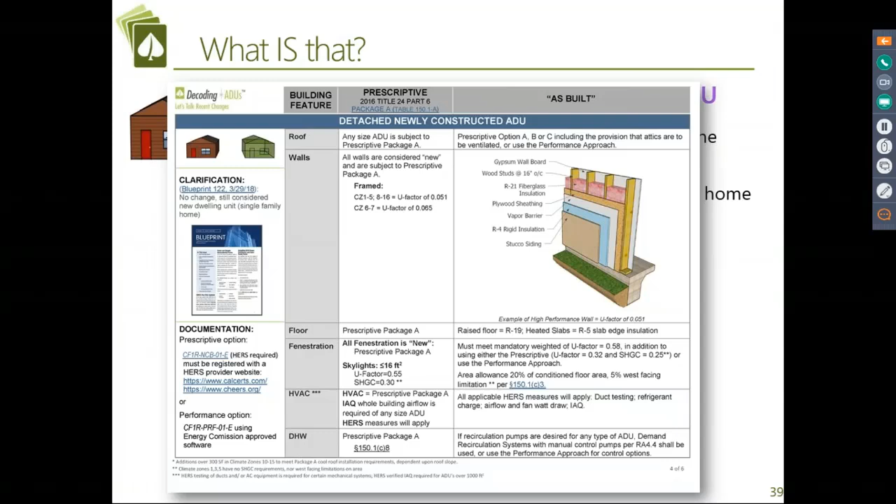Detached, brand new, never there before ADU - what is this considered by the energy code? An addition or a brand new home? A brand new home, and it has to meet all the requirements of a brand new home. I don't care how small it is. I have so many clients say, Gina, but it's only 400 square feet. I'm sorry, I'm really sorry. The energy code is really honestly developed to support a 2,400 square foot house. So this is where there's a lot of room for improvement on how the energy code applies - and yes, I'm representing the IOUs, someone else said that out loud and I nodded, okay. This is where there could be a little more leniency in play regarding the size of the home and how the energy code should apply to size and use. Are they really going to use the same amount of electricity and gas as a 2,400 square foot home? Maybe not, if it's built really well from the beginning, which is what the energy code wants. That's what this last page is all about - what has to happen for all those walls, the roof, the HVAC system, etc. It's treated like a brand new home, a brand new single family home. This is how much of the code looked at all these other ADUs we've talked about already, and this applies too. So now it's just left for the last man standing: you're building from scratch.

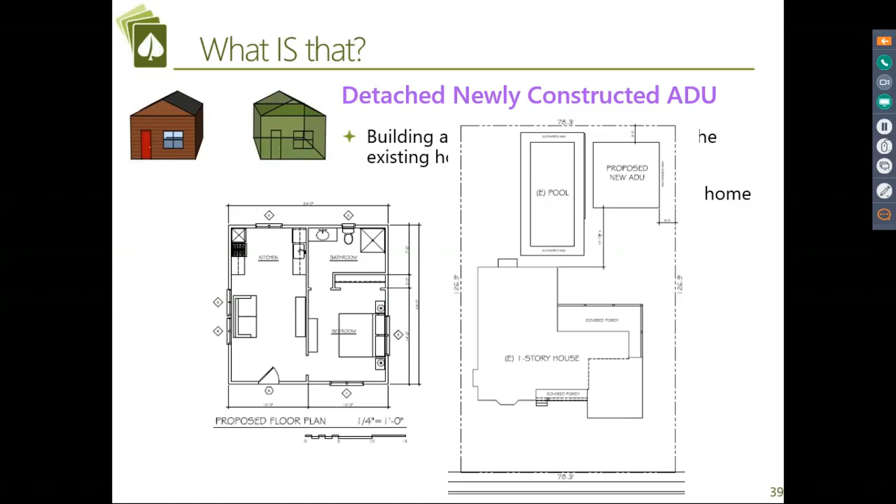There are no considerations for how close you are to the lot line, so that's something that has to be thought about when designing these. Are you designing for a high performance wall? That really needs to be thought of. So there's no change to how we look at these ADUs built from scratch.

It's what we look at, what we call prescriptive package A, in which we have a high performance attic. We looked at option A, we looked at option B for a high performance attic. We're about to look at option C.

Cool roof, I don't care the size of the space, cool roof is going to be required depending upon your climate zone. Radiant barrier is going to be required dependent upon your climate zone. Not if you're using option B though, that was that insulation below the roof deck, because you'd be covering up the radiant barrier. Covered up radiant barrier doesn't work the way we want exposed radiant barrier to work.

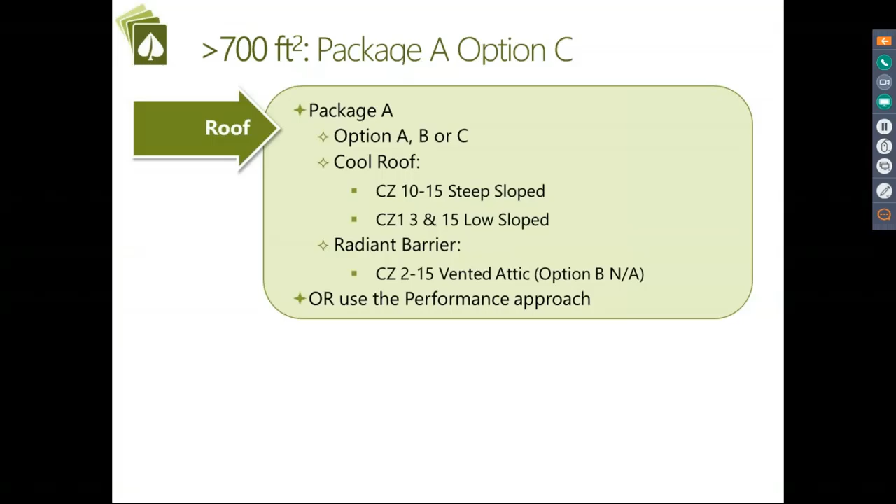Or you're going to use the performance approach to get flexibility for many of these options. Rarely is a brand new ADU ever done prescriptively because it's so restrictive.

So option C - we talked about the whole point behind high performance attic was putting those ducts up in the attic. Ooh, how about we don't do that? So let's think about maybe a ductless system, putting the ducts within the conditioned space.

A lot of things we can think of mechanically so that we can have a standard insulated roof like we're used to - insulation at the ceiling or at the bottom of the attic, a radiant barrier, and potentially a cool roof, and we're done. And if you want to do another layer of insulation, it's extra credit.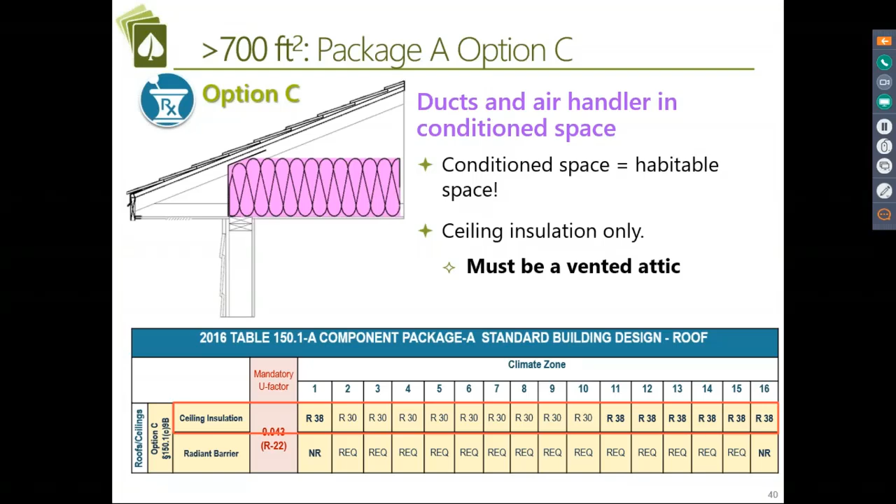So walls. We have that U factor, 0.051 for most of our climate zones. I've been saying over and over again, 2x6 wall with R21 and 1 inch of rigid. That's what the Energy Commission says is that standard wall. But there are other ways of doing it because we just have to meet the U factor.

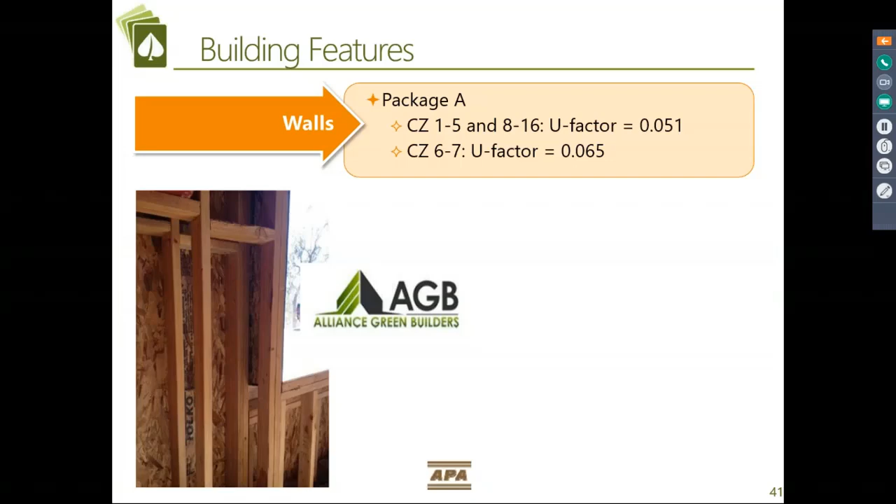Doesn't it make sense for a small ADU to do a double wall? Yeah, never ever, but I have to put it out there. Staggered wall - staggered wall is becoming very popular with our clients.

There's a lot more labor behind putting that insulation in there, and this is a 2x6 plate with 2x4 framing, and I'm carefully placing, fluffing, and using my crochet hook to put that insulation in among the framing. Would work quite well for spray insulation or blown-in insulation, which is very popular with this type of wall.

This is a nice way to keep your property line but still achieve that high U factor, and we're not using that much more expensive product.

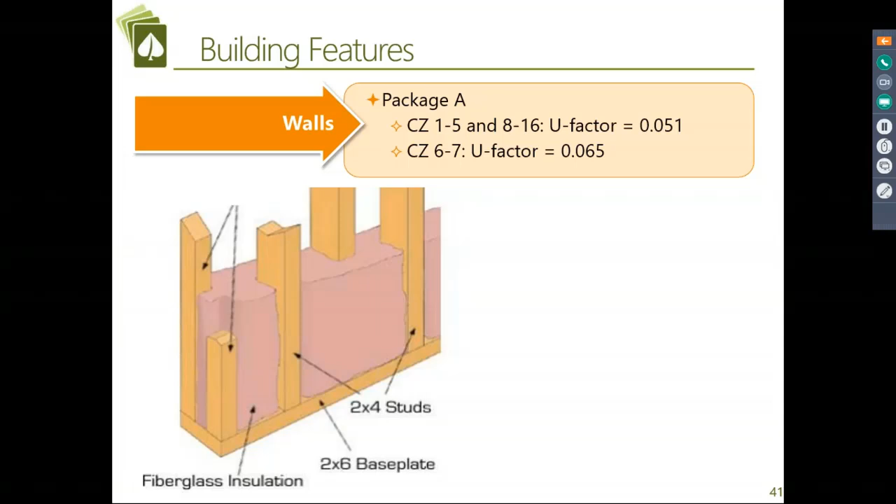SIPs wall - I'm from the 80s. You guys remember all those SIPs buildings from the 80s? Anyone here designing with SIPs? We're seeing more hybrid SIPs where maybe it's standard construction walls but a SIP roof, or SIP walls and a standard construction roof. There's a lot of stuff going out there.

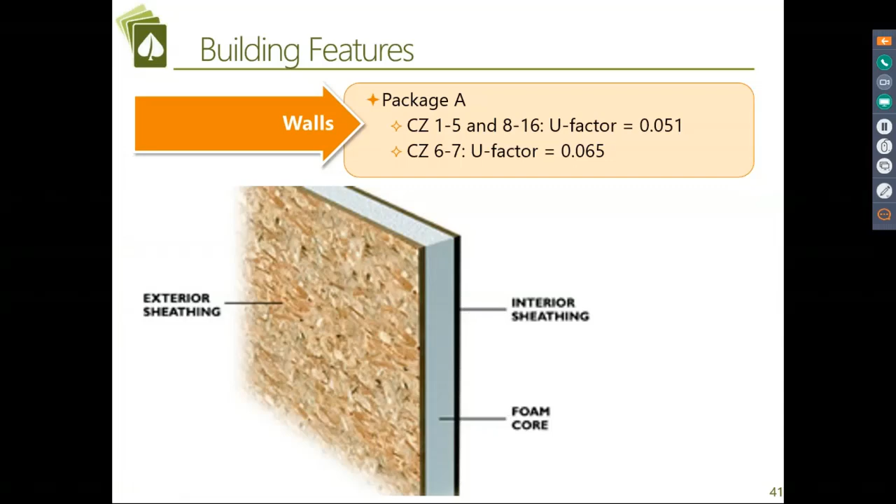This meets these requirements beautifully. There's a small company out of Santa Rosa called BamCore that's doing amazing things with this type of wall, pretty exciting. But this is what the Energy Commission is kind of looking at - we have a standard framed wall, and then we're attaching insulation to the outside, and our finishing products are going on outside of that.

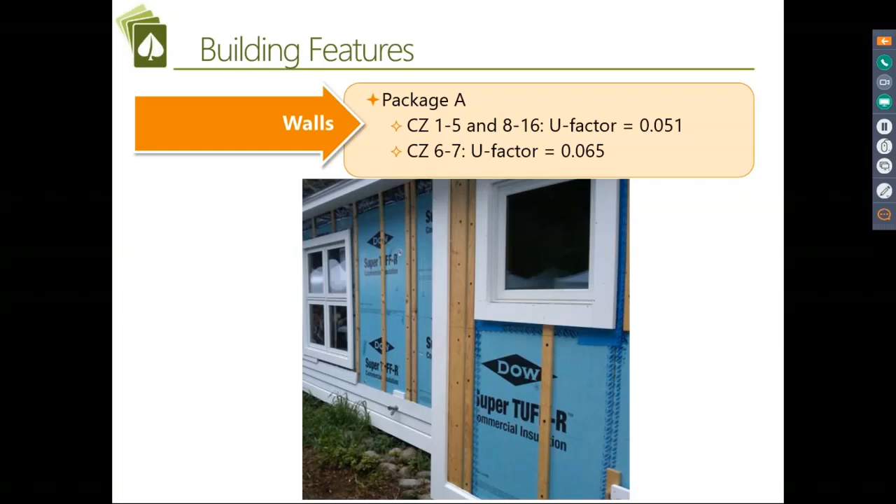Fenestration. Where does everyone want all their windows? Which orientation - north, south, east, west? West. Typically here, west is the beautiful view. It's where the water is. It's where the sunset is.

Let's think about how bad that is. So you get home at 5:30 - well, really 7:30 - and there's no sun. But let's say you live closer to home and you get home at 5:30. It's 110 degrees out. You turned on your AC. You pushed in all of that hot air into your house, and now you get to see the lovely sunset.

And the sun is hitting your windows, bringing in all that solar gain the entire time you're awake, until you go to bed. And then you go, finally comfortable.

So placement of windows, design of windows, doing anything to offset sun hitting those windows should be very much part of any design. This is becoming more and more of an issue in the Bay Area. We have an exception to SHGC in Climate Zone 3, but City of Berkeley, how many more AC units are being installed in your buildings in Berkeley?

It's happening more and more where people are adding AC to their homes, their apartments, et cetera, because they're getting really hot. Because, yes, there is global warming and it's getting hotter.

IOUs, yes, I did say that out loud. So we look at time-dependent value. What time are you using your energy in the day in terms of peak use conditions? Dependent upon where you are. Are you in the desert, or are you in the Bay Area? Can you see how energy use would be different based on where you are? And what's the value of the energy you're using?

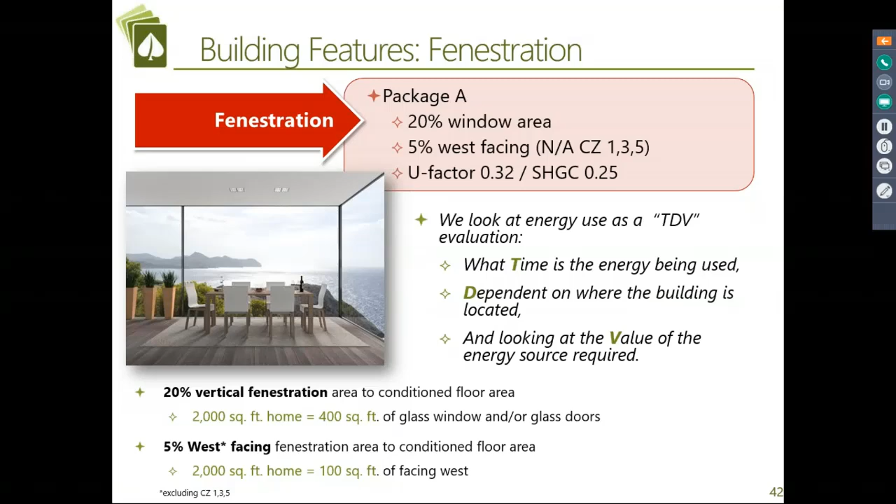Gosh dang it, I'm 2 minutes over. Electricity, gas, et cetera, is going to affect that. So that's why we have restrictions for brand new homes, including these small ADUs: 20% of your conditioned floor area, don't use it all in one place, and a 5% conditioned floor area restriction for west facing. Not in our climate zone, but the minute we go over the hill to Lafayette, Dublin, Pleasanton, et cetera, they would have these limitations.

You don't want to bring the gas out there? Heat pump technology is something we can use now in a performance calculation, and honestly we don't take any penalties for it. So even though prescriptively we're not allowed to do a heat pump water heater under current code, it works just fine in a performance calculation.

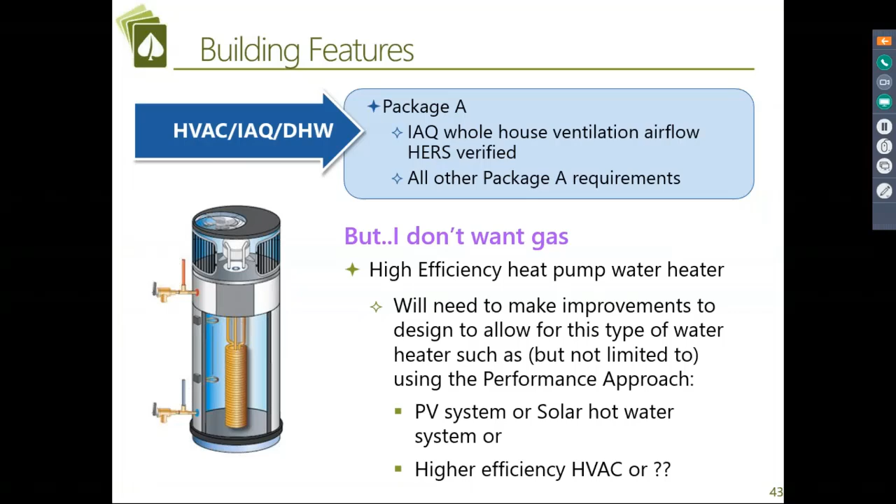PV. This is a brand new home, right? Well, we have PV allowances under this current code for extra credit. And what you're trading away is the ability to have to do a high performance wall or a high performance attic. Here in Climate Zone 3, we only have high performance wall requirements, so your PV credit is this big. Whereas you go over the hill to Lafayette, Dublin, Pleasanton, they have high performance attic and wall, so their PV credit is bigger.

This is all supposed to give the industry a code cycle to learn how to do high performance walls and attics. So it goes away in the next code cycle and becomes a prescriptive requirement to provide some sort of renewable, whether it be PV at the home, at the community, or battery storage. There's even going to be some provisions of energy storage within your appliances. How about you store energy in your water heater? How about you program your appliances to only be used at off-peak conditions? So there's all sorts of things being looked at for the next code cycle.

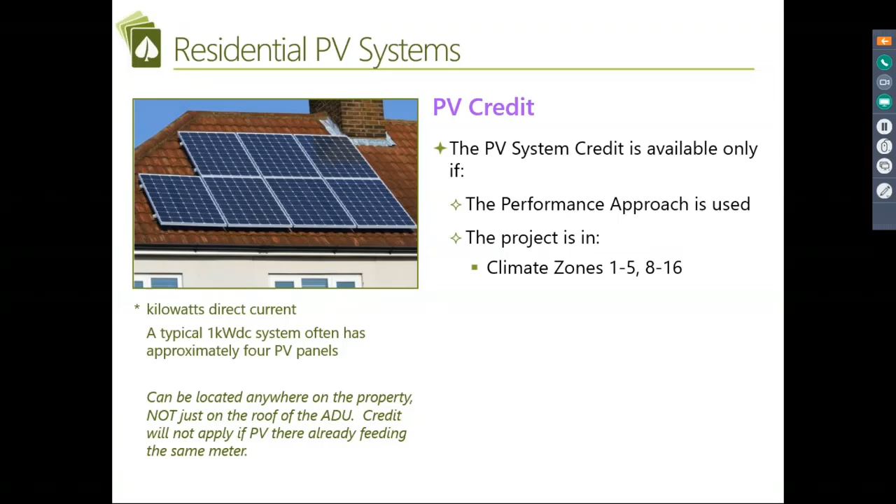For me, it's so exciting to be an energy consultant. That's really quite fascinating. So don't be sad that's going away. It's a good thing. Yay, we're done.

I'm a little bit over, so I'll let you guys decide. You are actually great. We have lots of time now for questions. We can have some good discussions. Did I talk fast enough? With the microphones, we're going to take it easy. Okay, we've got a microphone already.

I had known that most residential use the performance method, but I thought with ADUs prescriptive was common. Is that incorrect when it's an addition? So when I can use the prescriptive addition approach for those ADUs that are either converted space or attached to the existing home, it's beautiful, because all those exceptions I talked about apply prescriptively. But for new detached, performance is the only way to go. And will that continue to be true in the 2019 code? Yes. Okay, thanks.

Can I ask a question about architects? What are they likely to get wrong? What advice should cities give, or if we're trying to prepare material to help architects, what would you tell them? The biggest thing I see that's the issue is that the energy calculation does not speak to the design. We require our architects to understand when we said high performance wall what that meant and give us a detail that backs it up. A lot of other energy consultants who are cheaper and faster than me will just give you something that says building complies and has your address on it. Is that speaking to your design?